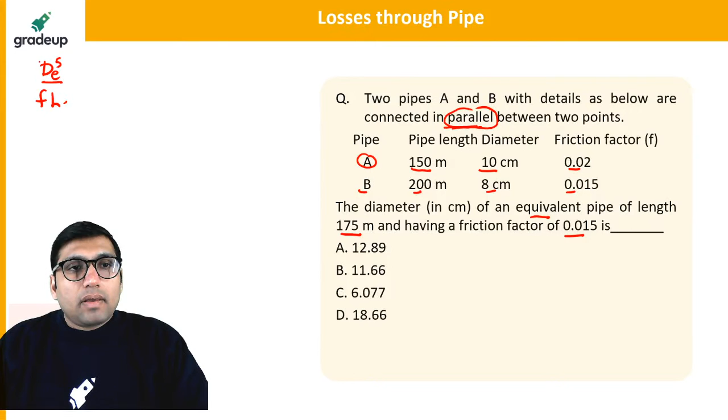Come on, be quick, guys. Equivalent diameter for a pipe in parallel connection. If you remember, I told you in the last lecture there was a formula: the equivalent diameter to the power 5, over friction factor into length, under root, is equal to root of D1 power 5 over F1 L1 plus root of D2 power 5 over F2 L2. This formula I told you for pipes in parallel connection. Didn't you remember this? For pipes in parallel connection, I told you two formulas. This one is for pipe in parallel connection with different diameters and lengths.

So you have to use this particular formula. Come on, be quick. The diameters of the two pipes are given. Let's say this is pipe 1 or A, and this is pipe B or 2. You can just put in all the values, and you will get the value of DE. You have to find this.

Very simple formula. Mohit Kundu, you will be getting 12. Okay, you are getting 12.89. Akhilesh is getting 12.11. So why will we be neglecting the value of F?

Will there be a thermodynamics and heat transfer crash course? Ashwin, the crash course of thermodynamics I have already completed. In that I completed the entire revision of thermodynamics, IC engine, refrigeration, and power plant. That is already available on the YouTube channel, you can find it there. But in the late night series also I will be covering thermodynamics, not the complete subject, but some important topics.

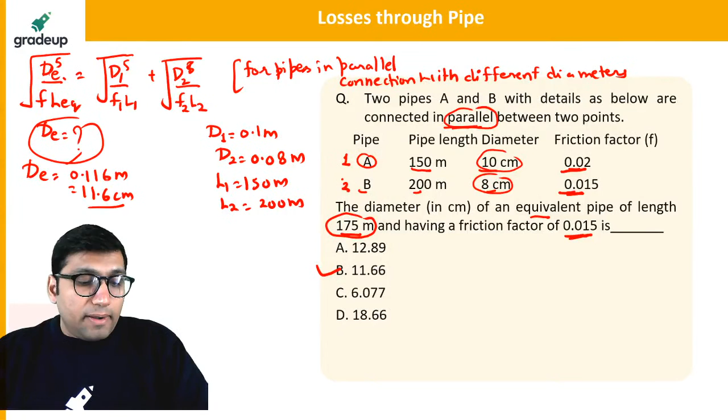You have already studied the theory of mechanics and thermo. So if you have already studied the theory part of fluid mechanics and thermo, you should only do the practice of questions. You should start solving the previous year questions and attempt the mock test. That is the best you can do now. Let's move on to question number 2.

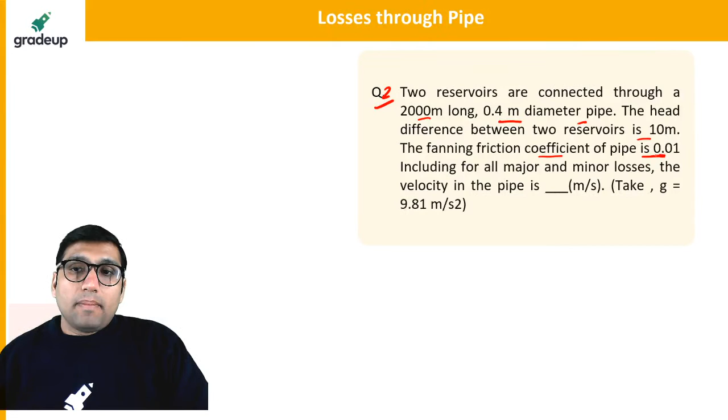Two reservoirs are connected through a 2000-meter long, 0.4 meter diameter pipe. The head difference between the two reservoirs is 10 meter. The fanning friction factor is given as 0.01. Fanning friction coefficient is 0.01. Including all major and minor losses, find the velocity in the pipe.

So how can we solve this problem? We are having two reservoirs, and these two reservoirs are connected with a pipe, let's say like this.

The two reservoirs are connected with a pipe. The length of the pipe is given as 2000 meter, and the diameter of the pipe is given as 0.4 meter. The head difference, let us say this is the level of the fluid in one reservoir, and this is the level of the fluid in the other. So the difference of the level of the fluid between both is equal to 10 meter.

Now what do you have to find? You have to find the velocity of the fluid in the pipe. They have given the total head difference between the two reservoirs, that is 10 meter. So H is equal to 10 meter.

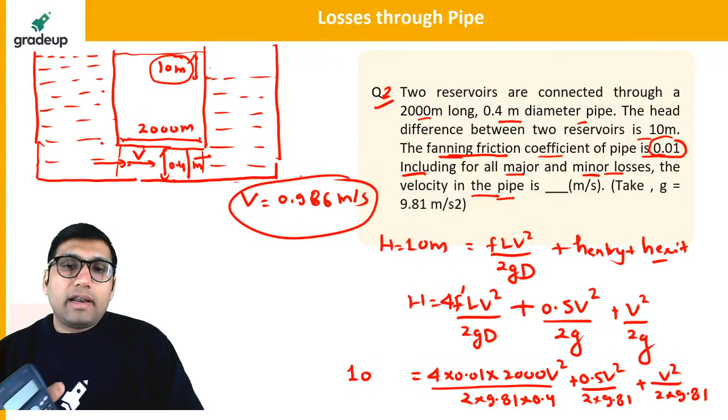It's not important if you don't have a virtual calculator, you can use a manual one. But take out your calculator and quickly solve the question. Hurry up, increase the speed.

Next question, question number 3. A horizontal pipe of diameter 400 mm is suddenly contracted to a diameter of 150 mm. The flow rate is 250 liter per second and the head loss due to sudden contraction is 1.8 meter. The coefficient of contraction is, tell me everyone, what is the answer?

Be quick, hurry up, be quick my dear. Yes Vikas, that is correct for the last question.

See guys, if you are simply watching the session and not solving the questions, you are not completely participating in the session. If you really want to learn something, you have to get completely into it. So take out your pen, calculator, a rough paper or notebook, and start solving these questions.

You have the advantage that you can do all that in your blanket. You don't have to come out to your study room and expose yourself to the cold like I'm doing, right? So my dear students, please do participate in the session and hurry up, be quick.

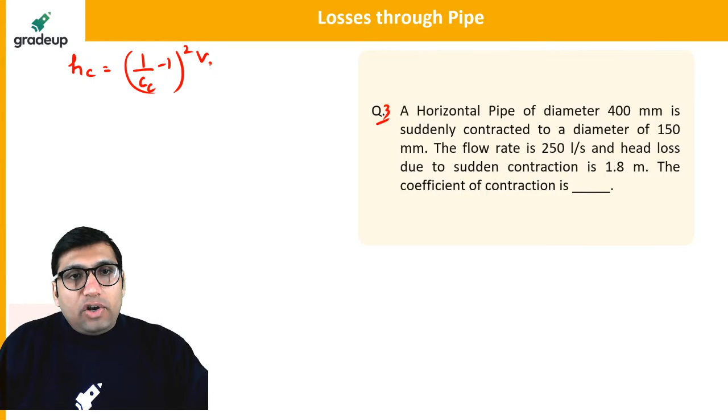The head loss due to sudden contraction equals 1 by coefficient of contraction minus 1, whole square, into V2 square by 2G. I told you this formula for the loss due to sudden contraction, didn't I?

Now in this formula you have to find the coefficient of contraction from the formula. They have given the head loss due to contraction, which is 1.8 meter. This will be 1 by coefficient of contraction minus 1 whole square into V2 square.

What is V2 here? You have to find V2 from here. They have given the diameter as 400 mm, which is 0.4 meter.

It is suddenly contracted to what diameter? It is contracted to 150 mm, which is 0.15 meter. The discharge is given as 250 liter per second, that is, discharge is given as 0.25 meter cube per second.

It is very important for you to reduce all the important terms into standard SI units. Because discharge is given in liter per second, you have to convert it into meter cube per second. Now you know that discharge equals area into velocity.

Now because you have to find the velocity, you put velocity V2 here. So you can also apply that discharge equals A1 V1 equals A2 V2. So discharge will be equal to A2 into V2, which is pi by 4 into D2 square into V2.

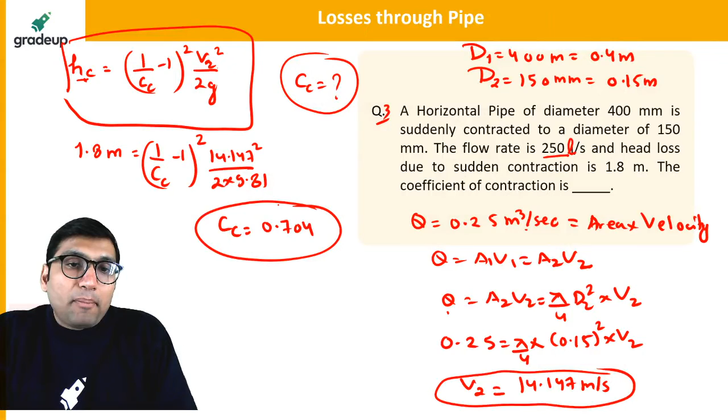Next question: the loss of head in meter when a pipe of diameter 150 mm suddenly enlarges to a diameter of 300 mm, with the rate of flow through the pipe being 300 liter per second. Here you have to find the loss due to sudden expansion.

Everybody is getting 0.704. Very good, it is very good that you are getting the answer correctly.

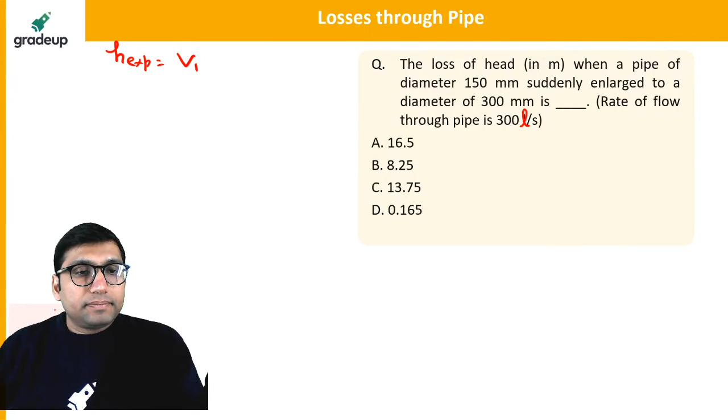The loss due to sudden expansion will be equal to V1 minus V2 whole square by 2g. That was the formula. You just have to find the velocities.

The diameter is given here: D1 is equal to 0.150 meter, D2 is equal to 0.30 meter. You have to find the value of velocity because diameter is not important, velocity is important. Discharge is already given as A1 V1 equal to A2 V2. Now using this formula you can find the value of V1 and V2.

Just put the value and you'll be getting the answer. Hurry up guys, be quick, please be quick, make it quick because we have to start a new topic also. I'm giving you 1 minute for solving this question since I have already told you the approach.

Yes, be quick, my dear students, be quick.

What I have experienced here is that the number of students who were watching the session earlier has reduced suddenly. When this series started, there used to be around 70 students in the class, but now I can see the number has reduced to just half. Why? Are you not feeling interested for preparation for the GATE exam, or do some students not find this timing suitable for the class?

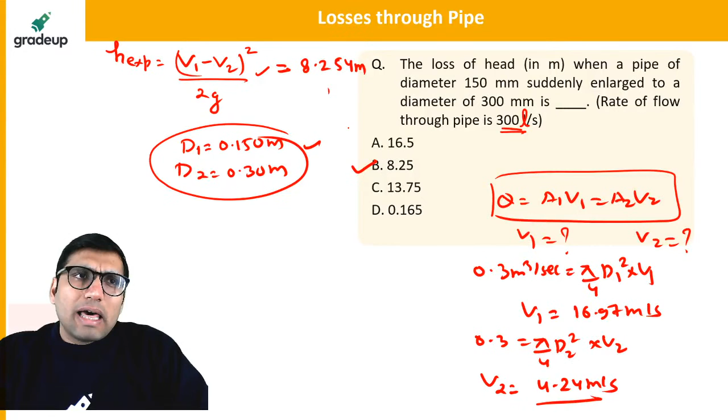Okay, the timings, well, timings were the same. I think timings have not changed because when this session started, even when the sessions were being taken by Vikas Sir, the timings were still the same, 11 p.m., right? The timings have not changed. I think from the last 10 to 15-20 days, the class has been going on with the same timings. But what has happened suddenly when I'm taking the subject of fluid mechanics?

Are you thinking that this subject is not important, or do you think that I'm not taking this subject well? What is your input? Please give me your input for this.

See, whatever important topics have been mentioned in the GATE syllabus, all those important topics I'm taking in these sessions. Still, I can see the number of candidates, the number of students, has reduced comparatively as compared to the previous sessions.

Hurry up guys. Three pipes of length 800 meter, 600 meter and 300 meter, of diameters 400 and 300 respectively, are connected in series. The end of the compound pipe is connected to two tanks whose water surfaces are maintained at a difference of 15 meter. You have to find the rate of flow in liter per second of water through the pipe, that is, the discharge. Hurry up guys, hurry up, be quick.

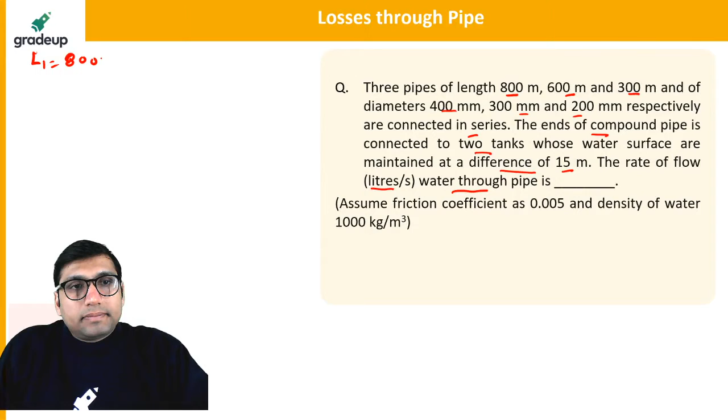3 pipes of length 800 meter, 600 meter and 300 meter. So the length of the pipe is given as 800 meter, 600 meter, and length 3 is 300 meter. This is the length of the pipe given. The diameter of the pipe is also given: 400 mm which is 0.4 meter, D2 is equal to 0.3 meter, and D3 is equal to 0.2 meter.

My dear students, what you have to do here is we are having two reservoirs, connected in such a way that we have two pipe connections. Let us say this is one pipe, then we have another pipe here. The diameter is reduced from 0.4 to 0.3, and again the diameter is reduced further. This is how the pipes are connected to another reservoir.

Now in this reservoir, if you see, the difference of the level of the fluid is given here. What is the difference given here? That difference is given as 15 meter.

We have already taken this same type of question into consideration, but the main thing here is if they have not mentioned the minor losses, we will not be taking the minor losses, because it is a case of pipe in series, the head losses will be added up. The head loss will get added up. Total head loss will be added up.

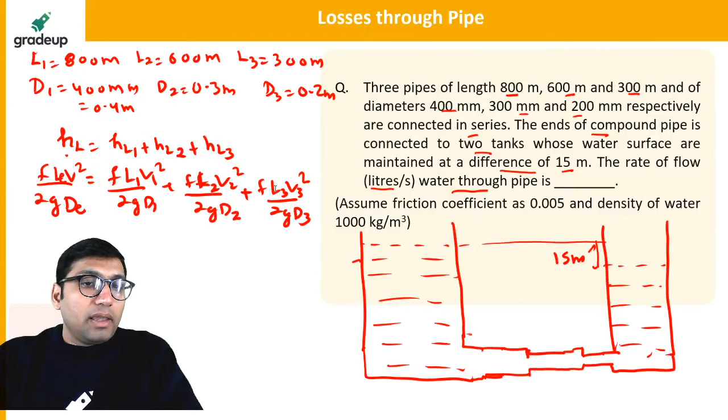You have to find the discharge in this question, which will be 84.79 liter per second. The answer for the discharge will be 84.79 liter per second. This will be the value of discharge.

Now for solving this question, it will be good if you convert this equation in terms of discharge. We know that discharge is equal to area into velocity, that is pi by 4 d square into v. It will be good if you calculate this value of velocity in terms of discharge, and put that value in.

As you know head loss is equal to FLV square by 2GD, so we can say this is equal to FL, and V is equal to 4 into Q by pi d square. This will be equal to 16 into Q square divided by 2 into pi square d power 5 into G. Correct?

Now in this question, they have given the friction coefficient as 0.005, not the friction factor. That means we have to also multiply by 4, f dash into 4. If you solve it, you get 2 into 2, this gets cancelled, giving 32 f dash L q square over pi square G d power 5. This is again the formula for head loss.

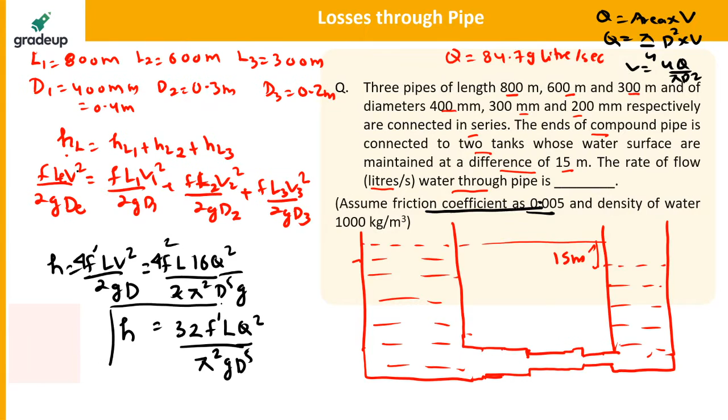If you put the formula directly, head loss will be equal to HL1 plus HL2 plus HL3, the head loss gets added up. So it is simply equal to: what is the head loss here? That was 32 into f dash L q square divided by pi square G d power 5.

This side also it will be equal to 32 into f dash q square divided by pi square into G. In the bracket you get L1 by d1 power 5 plus L2 by d2 power 5 plus L3 by d3 power 5. This we can get easily cancelled, so we can say that q square d power 5 will be equivalent to L1 d1 power 5... q square, one second... sorry, this is already given in the question, this value is already given, I will not be cancelling it.

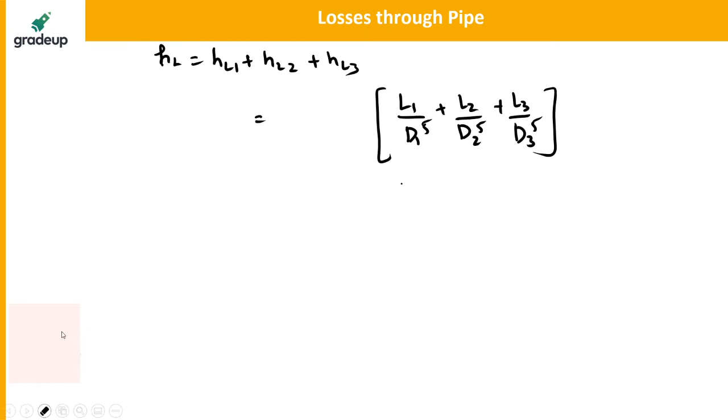84.7, are you getting this value? It will be 32 into f q square, f dash q square divided by pi square g.

This value is given as already 15. If you put all the values, friction factor is given, L1, L2, L3, D1, D2, D3 is given, everything is given, you will get discharge as 0.0847 meter cube per second, or you will be getting it as 84.7 liter per second. Are you getting this value, everyone? So see, I could have directly applied the Dupuit's equation, but in that situation we will not be getting the discharge.

Dupuit's equation is in terms of length and diameter. Here we have to find that in terms of discharge. So we have basically converted our equation in terms of discharge. Is it clear to everyone? Yes.

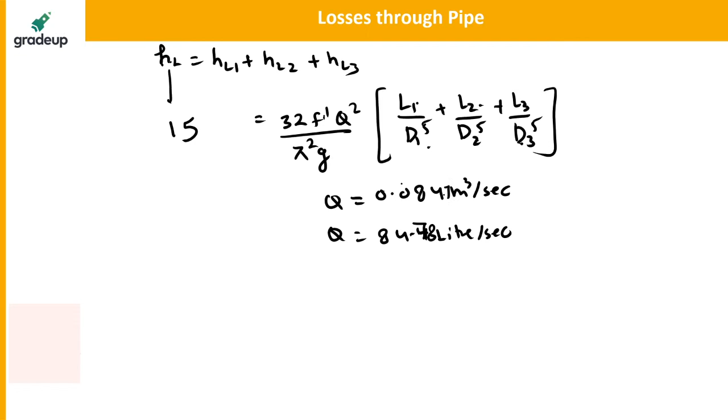Is it clear? That was the last question. Now let us quickly hurry up. You will be getting 84.7, 84.78, 0.0847. Okay, so now let us come to the topic of viscous flow through pipe.

I will not go very quick, but I will be making you understand the concept of viscous flow very comfortably. See, what is the meaning of viscous flow first of all? As it is quite evident that viscous is related to the concept of viscosity, something related to viscosity, or it is something related to viscous force.

So for the meaning of viscous flow, no, why we are not considering the minor losses? If they are not mentioned in the question, we will not be considering the minor losses. Until and unless they are not mentioned to be considered, we will not be considering the minor losses. In the last question that we have solved earlier, they have already mentioned to include the minor and major losses, that is why we have included them. In this question, they have not asked anything to include the minor losses. If they will not ask anything, you will not be including the minor losses.

Oh, thank you so much, Neeta. Thank you so much. I hope you guys are enjoying the session. And let's basically move forward for viscous flow through pipe, which is the current topic of this session.

So these were few previous year questions from the last topic that we were not able to cover. So let's basically start the discussion.

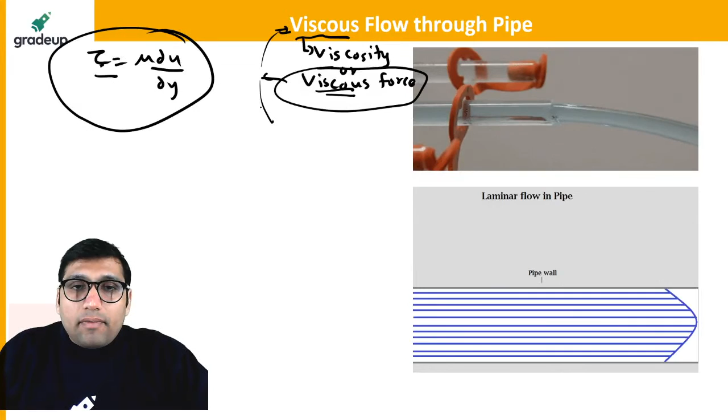Viscous force, or viscous flow, is defined as the flow in which high viscous forces or viscous effects are dominant. This is called viscous flow.

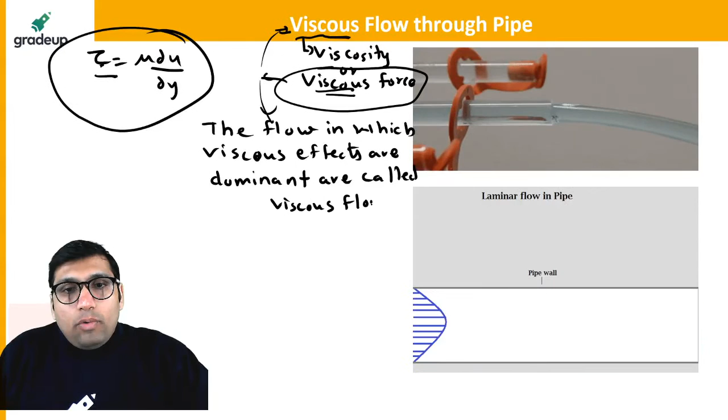To be very precise, you can also call it laminar flow. Why is it called laminar flow?

Because a flow is defined as laminar or turbulent based on a number called Reynolds number. Reynolds number is the ratio of inertia force by viscous force.

What is inertia force? It is defined as the force which acts exactly opposite to the direction of motion. Like F equals mass into acceleration, this force acts in the opposite direction to the force applied. That is called inertia force, which you must have understood from Newton's first law of motion.

So what is the meaning of laminar flow? Why is it called viscous flow? The simple meaning is that in the case of laminar flow in a pipe, the Reynolds number is less than or equal to 2000.

So why is the Reynolds number less than or equal to 2000 for laminar flow? Because viscous force is more dominant than inertial force. That means laminar flow is defined as highly viscous flow with low velocity. A flow characterized by high viscosity and low velocity is called laminar flow or viscous flow.

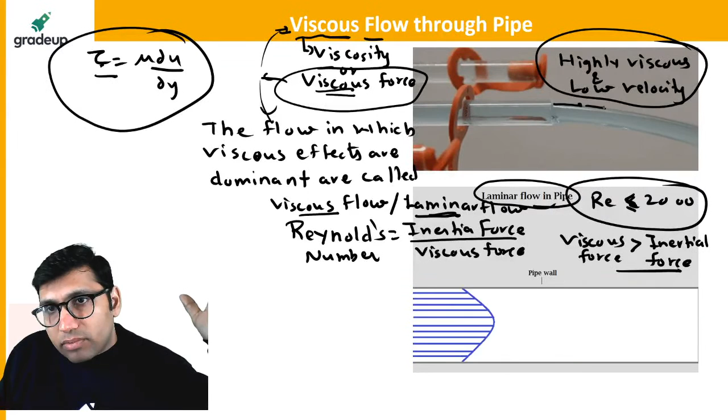The flow perfectly looks like it's flowing in a perfect pattern. If you clearly see, the fluid is exactly following a perfect pattern. This is how the laminar flow will take place.

You can see this animation also going at the bottom. This is how laminar fluid flow takes place in perfect streamlines, in perfect order. That is called laminar flow. Why does it take place in such a perfect manner? Because of the high viscous forces acting between the fluid particles, which allow them to move like this.

In comparison to laminar flow, turbulent flow has high velocity. It is characterized by high velocity flow and low viscosity. A flow with high velocity and low viscosity is termed turbulent flow. In the case of pipe flow, if the Reynolds number is greater than or equal to 4000, that is called turbulent flow. So that is the major difference between laminar and turbulent flow.

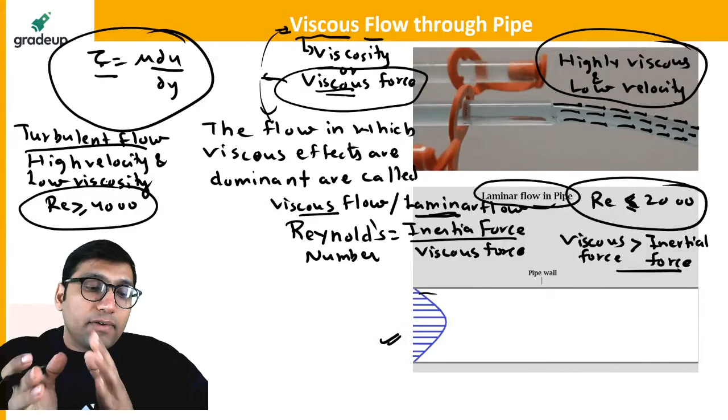Now I would like to point your attention to a very important thing. Since we are studying laminar flow in a pipe, I would like to point out a very important topic called fully developed flow. What is the meaning of fully developed flow?

When flow takes place inside a pipe, a pattern is followed. At the entrance of the pipe, the velocity profile will start to grow. Initially, when the fluid tries to enter the pipe, there will be little velocity gradients. At the surface of the pipe, the fluid particles will be having zero velocity due to no slip condition.

Due to no slip condition, the velocity will be zero. But as the flow proceeds inside the pipe, there will be some velocity gradient like this. If you join the points of maximum velocity, you will be getting this kind of layer which is called the boundary layer.

So what is this layer formed in the pipe? This is called the boundary layer. This is the layer having the maximum velocity. If you connect the points of maximum velocity, that is the free stream velocity, you get this layer which is called the boundary layer.

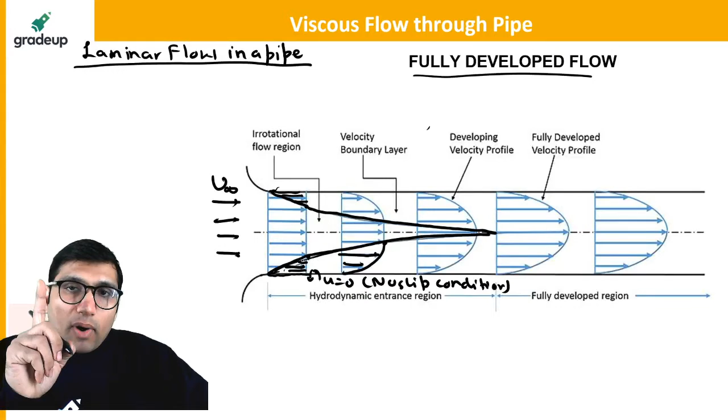Now the important point is, what is the meaning of fully developed flow? Fully developed flow is defined as the condition in a pipe flow, especially in a pipe flow, because in the case of flow over a plate, the flow is called fully developing flow. It is never a developed flow, it is always a developing flow. It is only possible for the flow to be fully developed in the case of flow through a pipe.

So it is defined as the condition in a pipe when the velocity profile becomes constant. If velocity profile becomes constant, that condition is called the fully developed flow, when there is no variation of the velocity profile. Initially, when the flow starts to proceed in the pipe, the velocity profile is perfectly flat, like this.

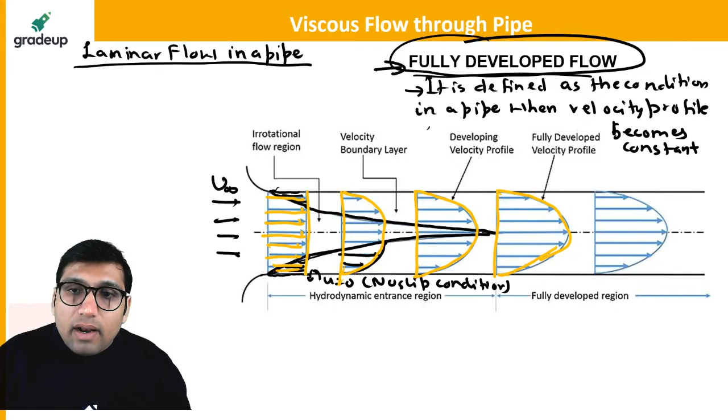But as you move further, the velocity profile will change like this. Now there will come a point in the fluid flow when the velocity profile becomes constant. It will not change after some point. As you can see in this region, after this particular point, the velocity profile has become constant. It is not changing, it has become perfectly constant like this.

So this region in which the velocity profile has become constant is called the fully developed region. After this particular point, the velocity profile will always be like this, no matter how far you go in this direction. The velocity profile will remain constant.

So this condition is called fully developed flow, when the velocity profile becomes constant. Or you can say du by dx in this direction will become constant. This is the meaning of fully developed flow.

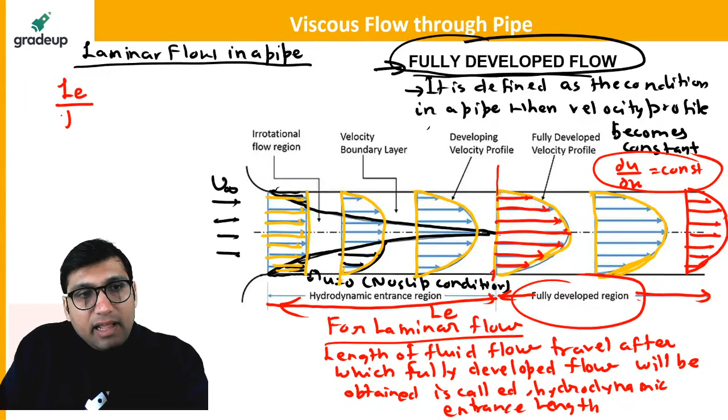So this length will be equal to LE, and LE by D is equal to 0.07 times Reynolds number. If you have to find the entrance length, the entrance length after which the velocity profile becomes constant, that entrance length LE is the entrance length in the pipe after which the velocity profile becomes constant. There will be no variation of the velocity profile after this particular length in laminar flow.

D is the diameter of the pipe, which is obviously a constant here. Diameter is not varying. Re is the Reynolds number into 0.07. By using this formula, you can find the amount of entrance length after which the velocity profile will become constant in laminar flow.

Is it clear to everyone? This is something which is sometimes asked in exams, sometimes repeatedly asked: fully developed laminar flow in a pipe. What is the meaning of this? Fully developed flow means in pipe flow, the region in which the velocity profile is not at all variable, the variation of the velocity profile becomes constant. There is no variation of velocity profile. That region is called fully developed region or fully developed flow.

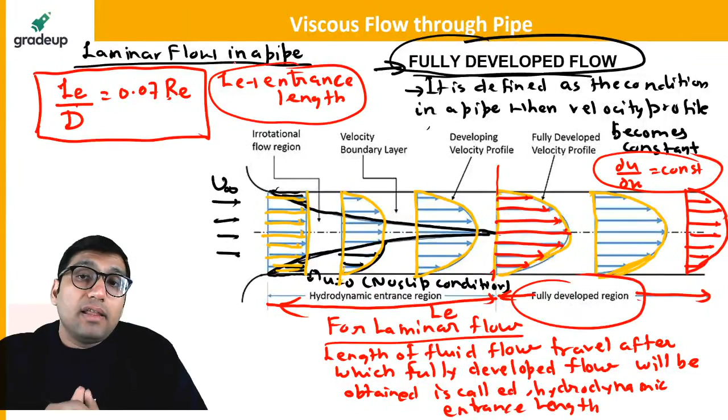Now there is a very important point. In pipe flow, there are some derivations that I have to tell you. Let us say we are having a pipe flow in a pipe, the fluid is flowing in the pipe, and we have to find the shear stress distribution for laminar flow through a pipe. So we'll be considering a fluid element. This is a fluid element.

On this fluid element, we will figure out what kind of forces are acting. Basically, there will be two forces acting: one is pressure force, and the other is shear force. If you apply the force balance equation, net force is equal to 0. Why? Because there is no acceleration, since the velocity profile is constant, acceleration will be 0.

Because the velocity profile is constant, velocity variation is not taking place. du by dx is 0 in fully developed flow, since the velocity profile becomes constant. So in that situation, there will be no acceleration, and net force will be 0.

What will be the net force here? Net force will be equal to the pressure force: P into pi r square, where P is the pressure on this particular area. On the opposite side, it will be P plus dP by dx. Let us say this particular small element has a very small radius equal to r.

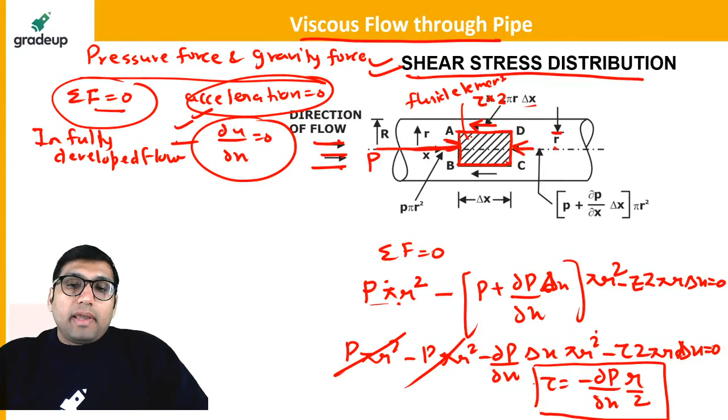You'll be getting this relation for the shear stress. The shear stress will be coming out to be minus of del P by del X of R by 2. This will be the value of the shear stress we'll be getting here, minus of del P by del X of R by 2.

Now shear stress distribution you have got. This is the shear stress distribution. Tau is equal to minus of del P by del X, R by 2, where R is the local radius. R is defined as a very small radius which is basically varying in the pipe. For a local radius means for a very small fluid element, the radius which is basically variable, that is called local radius.

So this is the shear stress which we'll be getting. What is the condition of how the shear stress will vary in the pipe? When R will become 0, when local radius will become 0, shear stress will become 0. When this local radius will become equal to the radius of the pipe, in that situation the tau will become maximum, the shear stress will become maximum, and that maximum shear stress will be equal to this. This will be the value of the maximum shear stress you will be getting.

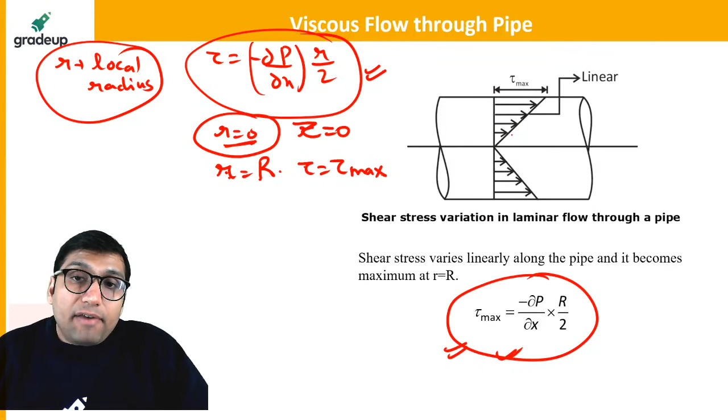So how does the shear stress vary in the pipe? In the pipe flow, the shear stress will be equal to 0 at the center, and it will be maximum on the wall. So we can say there is a linear variation of the shear stress in the pipe. The variation of shear stress in the pipe is actually a linear variation.

So let us talk about the velocity distribution in the laminar flow through the pipe. To understand the velocity distribution of the laminar flow in the pipe, let us say we are having a local radius r, and y is the distance from the pipe wall. What is the y here? Y is the distance from pipe wall.

Okay, in which we try to visualize the phenomena of velocity distribution. So we can say that if this is r, this is y, so this total distance will be equal to the radius of the pipe. So radius of the pipe will be equal to r plus y. If you differentiate this, you can say dr plus dy will be 0. Why? Because this radius of the pipe is constant, R is radius of pipe, it is a constant thing. This is variable, but this is not a variable. Radius is constant. So this will give you dr will be minus dy.

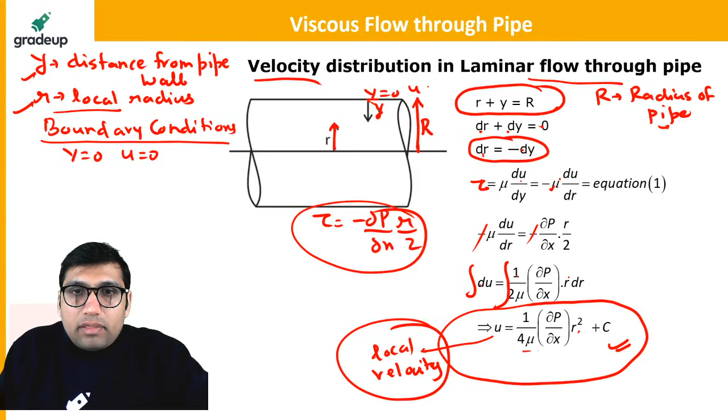Now there will be a boundary condition. What boundary condition will be used? There will be two boundary conditions used to find this constant. The first boundary condition is at y is equal to 0, u will be equal to 0. That means at this condition, when y is 0, u will be 0. That is also the no slip condition.

And another simple boundary condition involves local velocity. The local velocity is that velocity which varies with local radius. The velocity which varies with a local radius is called local velocity. So, my dear students, this is one boundary condition.

Other boundary condition is when r will become equal to R. In that situation, what will happen to the velocity? When r becomes equal to R, when this local radius becomes equal to the radius of the pipe, then u will become equal to 0. So if you put the value of r as R, you will be getting u equal to 0.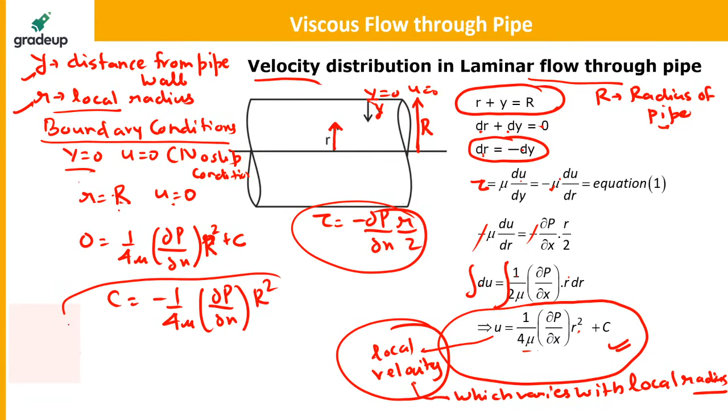That will be 1 by 4 mu del p by del x, r square plus constant. If we put r equal to R, this will be R. So you will be getting c as minus 1 by 4 mu del p by del x, R square. Now if you put the value of c in this equation, you will be getting u equal to minus 1 by 4 mu del p by del x, r square into 1 minus...

So I would like to write it again here. Your u, the local velocity, was equal to 1 by 4 mu del p by del x, r square plus constant. Your constant is equal to this. If you put the value of the constant, you will be getting 1 by 4 mu del p by del x, r square minus 1 by 4 mu del p by del x, R square, the radius of the pipe. If you take 1 by 4 mu common, you will be getting this.

If you take minus 1 by 4 mu del p by del x common, this will make the value R square minus r square. If you take r square common, you will get minus 1 by 4 mu del p by del x, r square, 1 minus r square by R square. So this will be the formula for local velocity.

Okay, all the best Prateek for your interview, the JRF interview at DRDO.

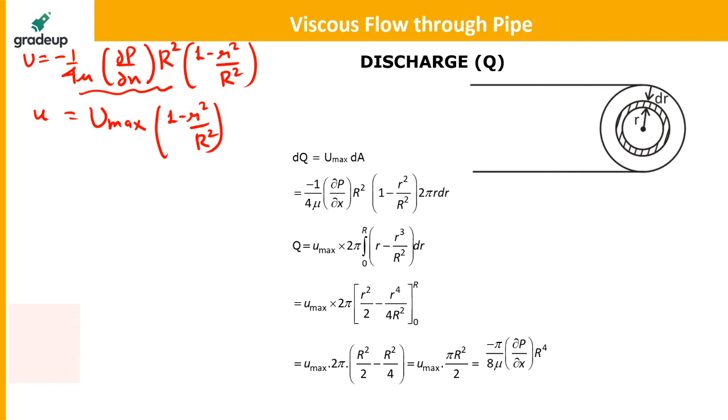One more important thing I have to point out here is how the velocity distribution takes place in laminar flow in the pipe. The velocity distribution is a parabolic velocity distribution. Velocity will be 0 at the pipe wall, and it will be maximum at the center.

When r becomes 0, u becomes maximum - that is the maximum velocity in pipe flow. For laminar flow in the pipe, the maximum velocity will be equal to minus 1 by 4 mu del p by del x of r square, where r is the radius of the pipe, del p by del x is the pressure gradient, and mu is the viscosity. This is the formula for maximum velocity.

So where does maximum velocity take place? At the center of the pipe. This is also called maximum velocity, or center line velocity, because this maximum velocity occurs at the center of the pipe.

Clear everyone? Maximum velocity, you can also call it center line velocity.

No problem, my dear. Two things I have noticed very carefully - congratulations first of all, Prateek, you are having your interview tomorrow. Another thing I have noticed is how much your attention level is in the class. You are preparing for an important GATE exam, but most of you are giving your time to comments in the chat box. Guys, if you will not focus in the lecture, then how are you going to understand it? There is enough time for discussion about other things, but right now you have to focus on the lecture, my dear.

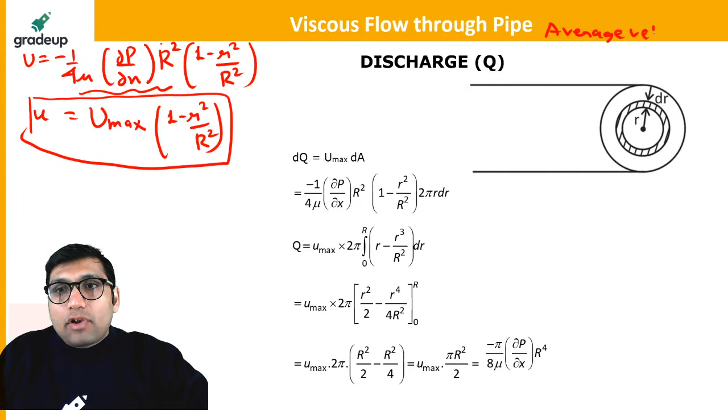But for solving problems, you need the value of average velocity. Why is average velocity required? Because there is a velocity distribution in the pipe - velocity is not constant, it is variable. There is zero velocity at the wall, maximum velocity at the center, and at other points the velocity will be variable.

If you have to find the Reynolds number, which is rho V d by mu, how can you find this? For Reynolds number, we have to put the velocity which has to be average velocity, my dear. Average velocity, is it right? For finding Reynolds number, you have to find average velocity. But velocity is varying in the pipe - there is a variation of velocity in the pipe.

It is maximum at the center, zero at the wall, and has a different value at other portions in the pipe. For finding the Reynolds number, you have to find the average velocity. So how can you find the average velocity in flow through a pipe? For that, we have to do some derivation. You know that discharge is equal to area into average velocity.

So we can say that a small discharge in the pipe will be equal to local velocity into a local small area. After finding this small discharge, we can integrate it to find the total discharge. This small discharge equals local velocity times area - you can put the value of local velocity in this relation. Area, dA, will be equal to 2 pi r into dr - this is the change in area.

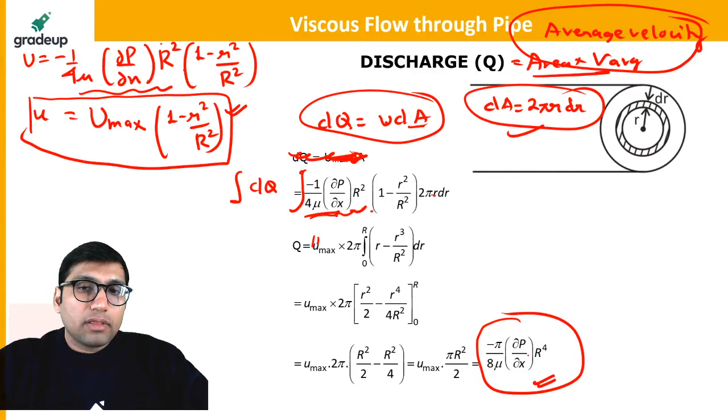After integrating, for the laminar flow through pipe, the discharge is equal to minus pi by 8 mu del p by del x r power 4. Are you able to understand this or not? This is the value of discharge in laminar flow through pipe, or viscous flow through pipe.

If you are not able to understand the integration, I can tell you again, although it is mentioned. This value is equal to the maximum velocity, this quantity.

If you multiply this quantity 2 pi r inside, this will be r minus r cube by r square. If you integrate this, you will be getting r square by 2 minus r power 4 by 4 r square. If you put the limit, you will be getting this quantity.

Again, we will be putting maximum velocity as minus 1 by 4 mu del p by del x of r square. If you put the value, you will be getting this value of the discharge. So this is a formula for total discharge in the pipe, laminar flow through pipe, in terms of radius.

If you have to find it in terms of diameter, you know that r is equal to d by 2. If you put r is equal to d by 2, you will be getting the total discharge in terms of diameter, which will be this. This will be the formula for total discharge in terms of diameter of the pipe.

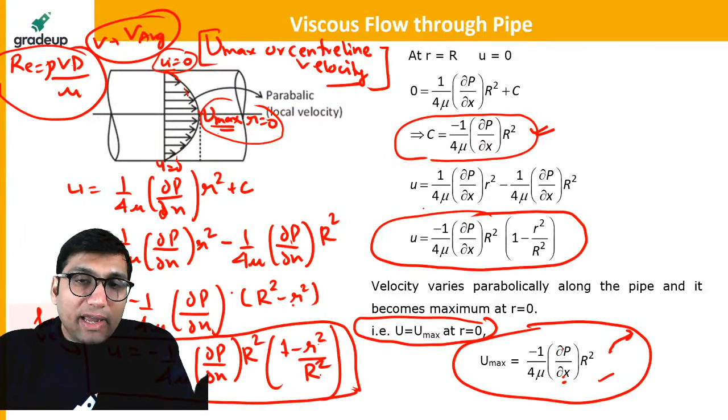So you'll be getting this value as total discharge for the laminar flow through pipe, and you can also say, in terms of radius, it is equal to minus pi by 8 mu del p by del x r power 4. This is the formula for total discharge in terms of radius, and this is in terms of diameter.

Now, why are we finding this total discharge in the laminar flow through pipe? The reason we are finding the total discharge was we have to find the average velocity. And how can you find the average velocity? The average velocity will be equal to, the total discharge is equal to area into average velocity.

What is the area of the pipe? Area will be equal to pi r square. So you can put this value, total discharge is equal to average velocity into area, pi r square. This will get cancelled out, this will be r square. If you solve it, you will be getting this as average velocity. So this is the value of the average velocity of the laminar flow through pipe.

The maximum velocity was equal to what? This is the maximum velocity, this is the average velocity. If you see the relation between the average and maximum velocity, you will find that the average velocity is equal to half of the maximum velocity for laminar flow through pipe. This is a relation between the average and maximum velocity.

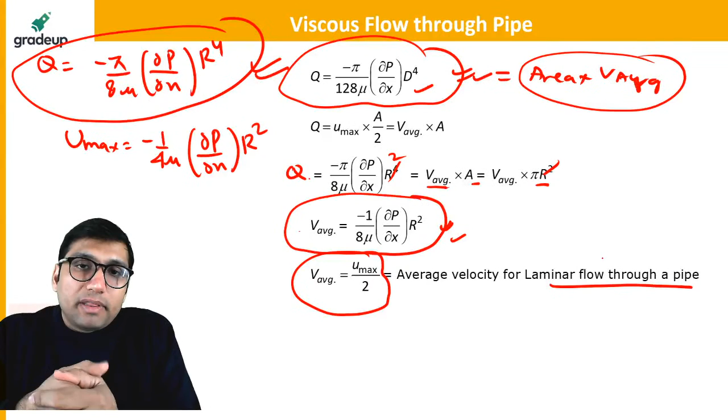So let us understand another part, which is pressure drop in laminar flow through pipe. If you have to find the pressure drop in laminar flow through pipe, how can you find that? Let us say we are having a flow through a pipe, and in this pipe section, if you have to find what is the variation of pressure between these two particular portions in the pipe. Let us say the distance between these two portions is L, and you have to find the pressure drop between two sections of the pipe. Let us say this is section 1, this is section 2.

So what is the pressure drop between these two particular points in the pipe? How can you find that? We know that the average velocity is equal to half of the maximum velocity. We have just figured it out, right? Average velocity in the pipe is half of maximum velocity, or we can say maximum velocity is equal to 2 times average velocity. What is maximum velocity?

It is equal to minus 1 by 4 mu, del p by del x, of r square. If you put all the terms on the other side, it will be equal to minus del p is equal to 8 mu V del x by r square.

If you integrate it from 1 to 2, this will be integrated from 0 to L. Let us say the length here is 0 and here it is L. If we started from 0, this will be L total. The dx will be integrated from 0 to L. So here the limit will be from 1 to 2, and here the limit will be from 0 to L, because length will be varying from 0 to L, right? So if you integrate it, you will get P1 minus P2 equals 8 mu L V by R square.

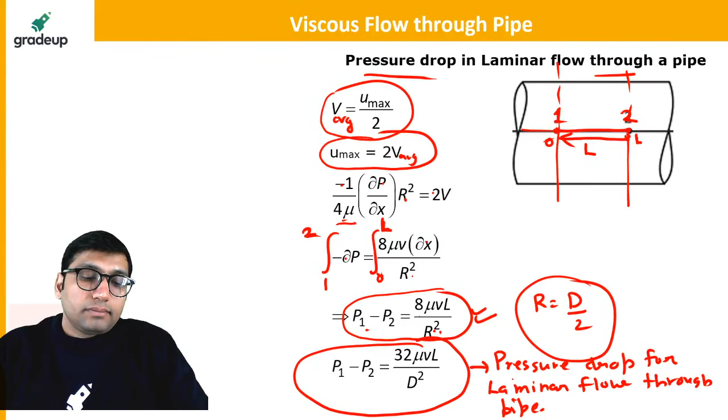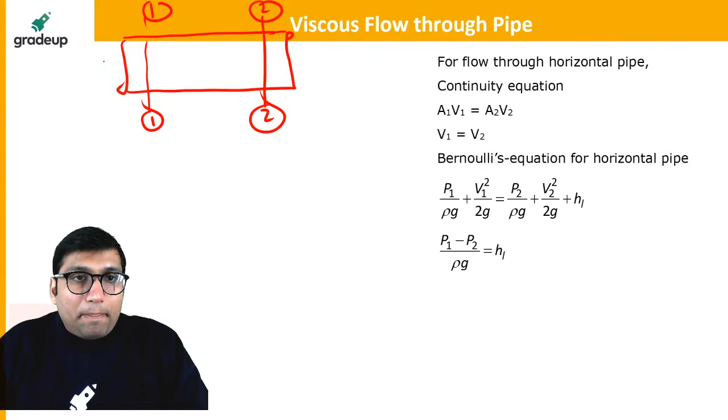Now I have to tell you a very important thing. Let us say we have a pipe, and in that pipe, this is section 1, this is section 2. Between these two sections, if you apply the continuity equation to the flow through the pipe, it will be A1 V1 equals A2 V2. Now because this pipe has constant diameter, it is not variable, so A1 will equal A2 in this situation, and because A1 equals A2, V1 will also equal V2.

Now if you apply the Bernoulli equation for a horizontal pipe, for a real fluid, it will be this. This is the Bernoulli equation for a horizontal pipe for a real fluid. Now because the velocity will be the same, it gets cancelled out. And because it is a horizontal pipe, Z1 equals Z2. So ultimately we get the head loss for laminar flow through a horizontal pipe of uniform diameter equal to P1 minus P2 by rho g.

So we are coming to a very important equation. As I just told you, for laminar flow, P1 minus P2, that is the pressure drop, is equal to 32 mu VL by d square. This is the formula for the pressure drop for laminar flow through a pipe. If you put the value of this pressure drop here, you will get the head loss equal to 32 mu VL by rho into g d square.

This is the formula for the head loss you'll get for laminar flow through pipe. Clear everyone? And to be very precise, this is the formula you'll get for fully developed laminar flow through pipe. This is the formula for head loss for fully developed laminar flow through pipe.

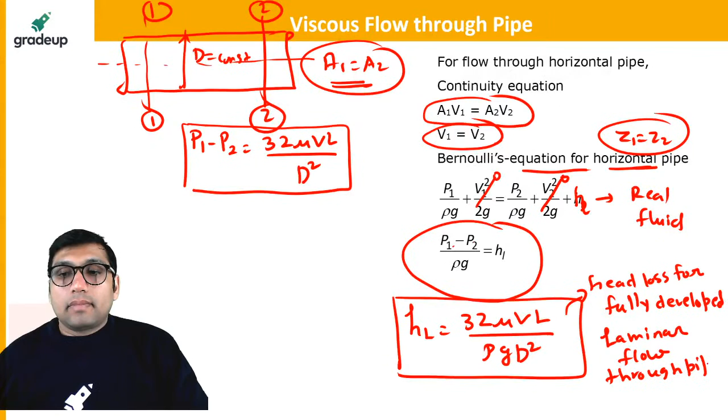So my dear students, we have got the head loss formula. The head loss due to friction for fully developed laminar flow in a pipe is equal to 32 mu VL by rho g d square. But we also cannot ignore that in the last lecture I told you the formula for head loss due to friction, the major head loss due to friction, which was FLV square by 2gD. This is also the formula I taught you in the last class.

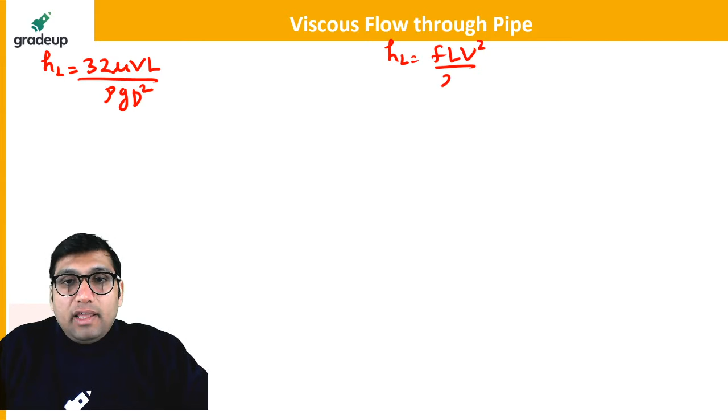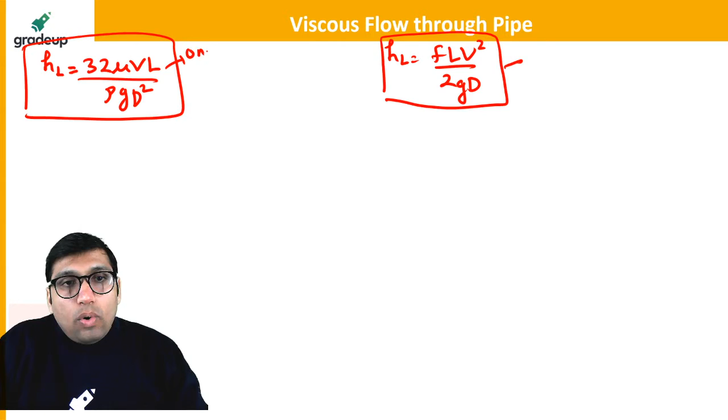Now if you equate both formulas, this is also the formula for major head loss due to friction, but this formula can be applied anywhere, whether it is laminar flow or turbulent flow, anywhere. This other formula can only be applied for fully developed laminar flow in a pipe.

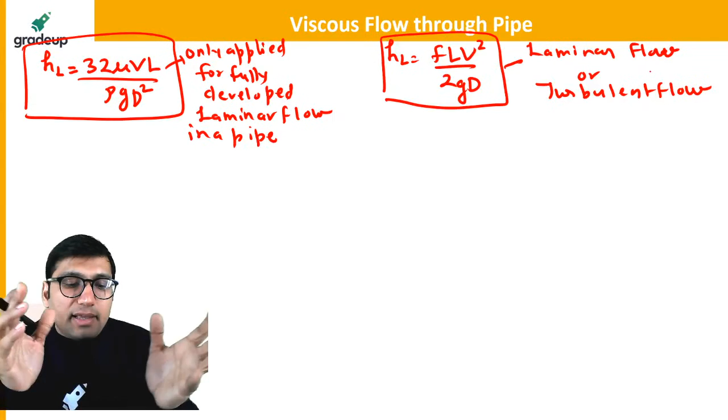Laminar flow in a pipe. This formula cannot be applied anywhere else. But this formula, my dear, can be applied for both laminar flow and turbulent flow. It can be applied for laminar flow or turbulent flow to find the major head loss due to friction. Now you must be thinking, is there any relation between these two we can get from here?

So if we are having a laminar flow, and fully developed laminar flow, we have got this head loss. If you equate these two, equation number 1 and equation number 2, because this can also be applied for laminar flow, you will be getting 32 mu V L by rho G D square is equal to f L V square over 2 G D.

Right? Here everyone. Or if you just do some cross product here, this will get cancelled out. Sorry, rho will not get cancelled out. This will get cancelled out here. One of the velocities will get cancelled out here. The length will get cancelled out here. Ultimately, you will be getting that friction factor will be equal to 64 into mu divided by rho V d. As we know that Reynolds number is equal to rho V into d by mu.

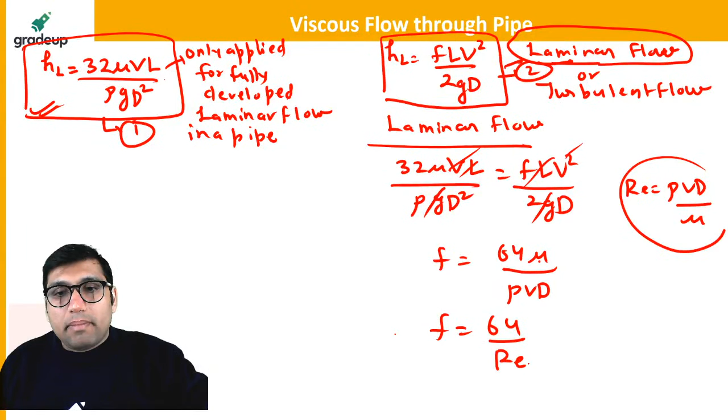So we can also say that this friction factor is equal to 64 by Reynolds number. This condition is only applied for friction factor. The friction factor can also be written as 64 by Reynolds number only for laminar flow in a pipe. You cannot apply this formula for friction factor in any other condition. For laminar flow in a pipe, the friction factor is equal to 64 by Reynolds number, and we can say friction coefficient will be equal to 16 by Reynolds number.

This is friction coefficient, or coefficient of friction, or Fanning coefficient of friction. Clear everyone? The coefficient of friction will be equal to 16 by Reynolds number and friction factor will be equal to 64 by Reynolds number for laminar flow in a pipe. Is it okay with everyone?

Is it clear? So my dear students, I would like to point out a very important thing here: it is only applied for laminar flow. First of all, this formula can only be applied for laminar flow. If it is a laminar flow in a pipe, then only you can apply this formula for head loss. Okay, we can discuss, it is correct, Manish.

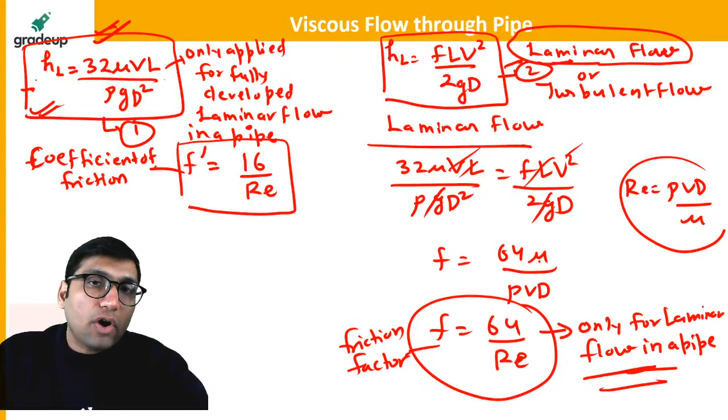For turbulent flow it will be 0.316 divided by Reynolds number power 1 by 4, but that we'll discuss in the turbulent flow topic. Okay, so that is all important for your laminar flow in a pipe. You have to remember some basic formulas for laminar flow in a pipe.

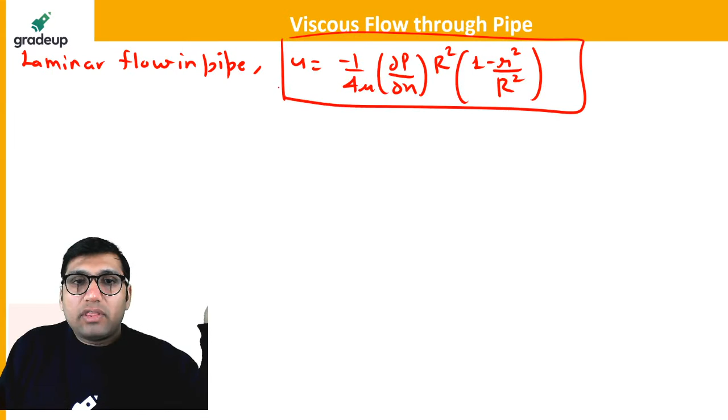The formula which is important is the formula for velocity distribution. Local velocity is equal to minus 1 by 4 mu, del p over del x, into r square times 1 minus r square by r square. This is the formula for local velocity, the velocity distribution. One more thing: the velocity distribution in the pipe flow is a parabolic velocity distribution.

So this is how the velocity distribution will be taking place. The velocity will be maximum at the center and it will be zero at the wall. This is a parabolic velocity distribution. I have also told you the shear stress. Shear stress is equal to minus of del p by del x, r by 2. This is the local formula for the shear stress.

The maximum shear stress takes place at the wall; we can say it is equal to maximum shear stress in the laminar flow in a pipe. How does the shear stress vary in a pipe? This is how the shear stress varies in the pipe. Okay, it is zero at the center and maximum at the wall. This is how the shear stress will be varying.

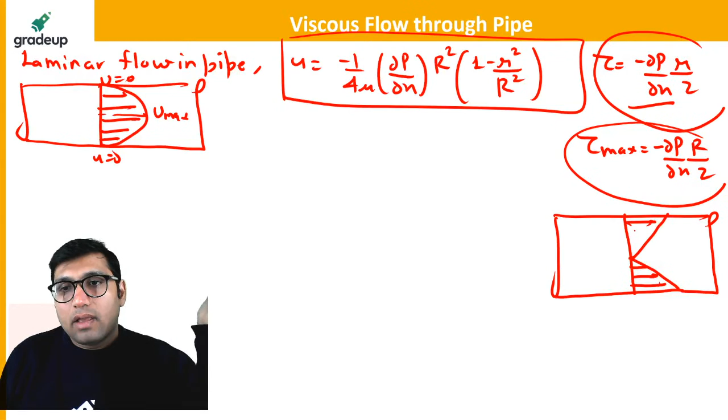Okay, this value is the maximum velocity. For maximum velocity in a laminar flow in a pipe, it is equal to minus 1 by 4 mu, del p over del x, of r square.

Discharge is equal to minus pi by 128 mu, del p by del x, d power 4. This is the formula for discharge for laminar flow in a pipe. The average velocity in a laminar flow in a pipe is equal to minus 1 by 8 mu, del p by del x, of r square, or we can say average velocity is equal to half the maximum velocity.

The pressure drop is equal to 32 mu V L by d square, and the Hagen-Poiseuille equation says that the head loss in a laminar flow in a pipe can also be written as 32 mu V L by rho g d square, and friction factor for laminar flow in a pipe is equal to 64 by Reynolds number. These are some important points that you have to remember for laminar flow in a pipe.

I have revised all the important formulas that you require for solving the problems for laminar flow in a pipe. Is it clear to everyone?

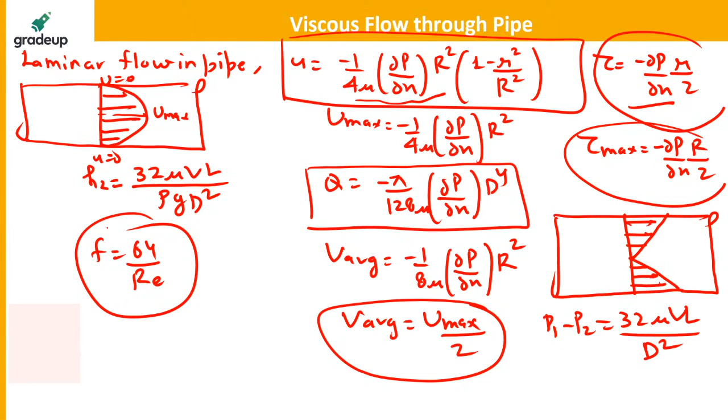What about r power 4? Where will it be r power 4, Vikas? In terms of diameter, it will be minus pi by 128 mu del p over del x, d power 4. In terms of radius, it will be r power 4. I have written the formula for discharge in terms of diameter.

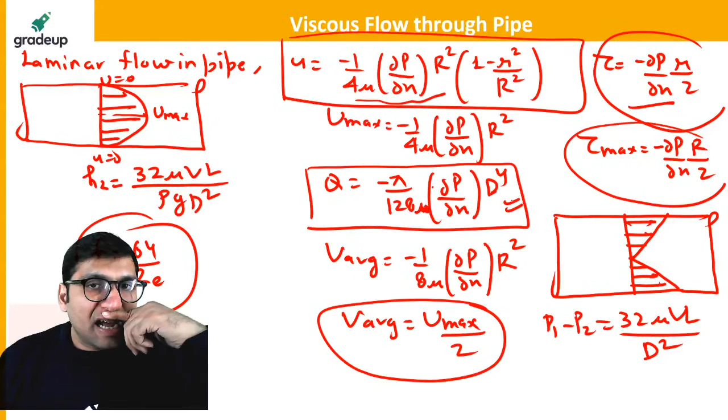Since this is not something I had decided for this session, I feel like just telling you about viscous flow through pipe will not be sufficient. So I would like to point out a very important topic: viscous flow through a plate, especially the flow between two parallel fixed plates. I will tell you some relations which are important for laminar flow between two parallel fixed plates. Let us say we are having two parallel fixed plates.

Thickness between the plates is equal to B. B is the thickness or distance between the two plates. These are the two parallel fixed plates.

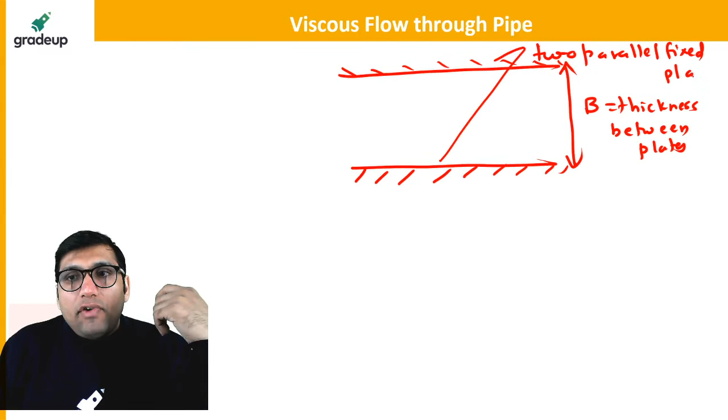So if you have to study laminar flow between two parallel fixed plates, I hadn't planned to discuss this, but I feel I should tell you because it is important too. Just like laminar flow in a pipe is important, laminar flow between two parallel fixed plates is also important. So I will only tell you some important formulas that you have to remember. I cannot teach you everything since I haven't planned for it, but I will tell you the key formulas for laminar flow between two parallel fixed plates.

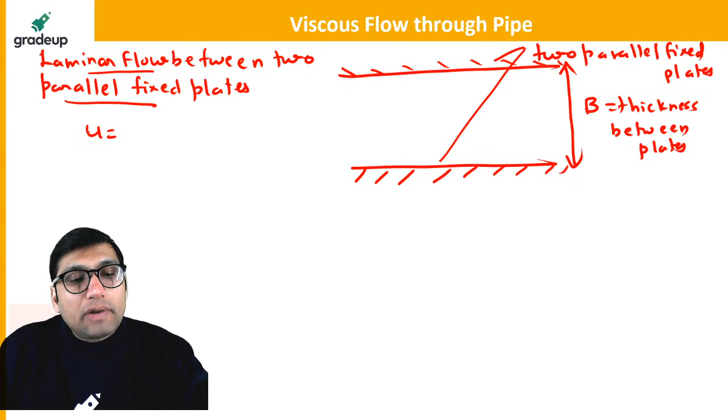So my dear students, for laminar flow between two parallel fixed plates, the velocity distribution you will get is the local velocity distribution, given by 1 by 2 mu del p by del x.

I will not explain how we derive this since we don't have much time. The formula is 1 by 2 mu del p by del x of b y minus y square. This is the formula for the velocity distribution for the flow between two parallel fixed plates.

One more thing: in the case of laminar flow between two parallel fixed plates, the velocity distribution is parabolic here also. There will be maximum velocity at the center and zero velocity at the wall between the two parallel fixed plates. At the surface of the plate, the velocity will be zero because of the no-slip condition, and it will be maximum at the center. So we will be having a parabolic velocity distribution here also.

Is it clear to everyone? And what will be the maximum velocity in this case? You will get the maximum velocity when y becomes b by 2.

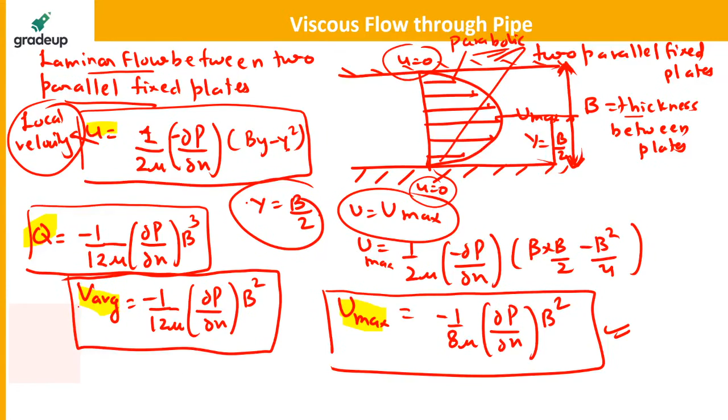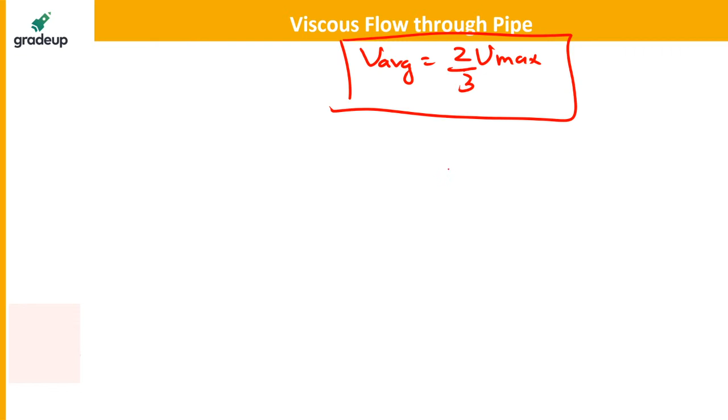One more thing, for laminar flow between two parallel fixed plates, the average velocity will be equal to 2 by 3 of maximum velocity. This is a relation between the average and maximum velocity for laminar flow between two parallel fixed plates. So we can say that the average velocity is equal to 2 by 3 of maximum velocity.

And the pressure drop will be equal to 12 into mu into V into L by B square. This will be the value of the pressure drop. In a flow between two parallel fixed plates, if you have to find the pressure drop between two sections, point 1 and point 2, the pressure drop between these two sections will be equal to 12 into mu VL by B square, where B is the distance between the two fixed plates.

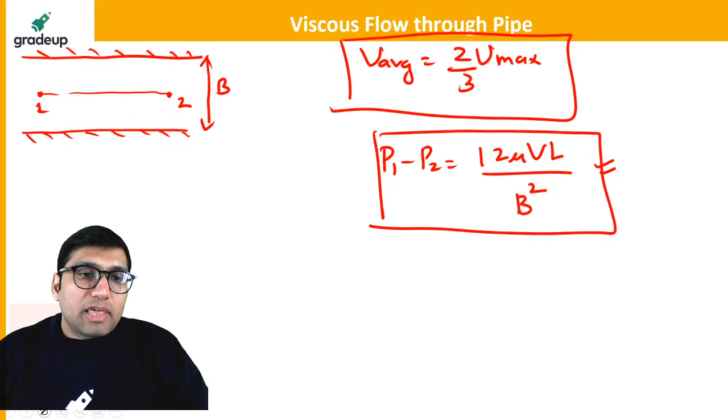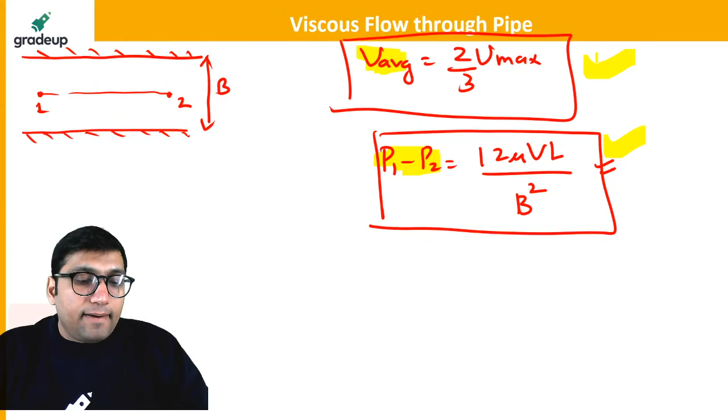Is it clear everyone? Are all these formulas clear or not? So this is all important, whatever I'm highlighting here, this is all very important. Please be very much careful about this, whatever I'm highlighting here. These formulas are very important, because sometimes in your exam they will be asking you questions on these things from laminar flow between two parallel fixed plates. So these formulas are important.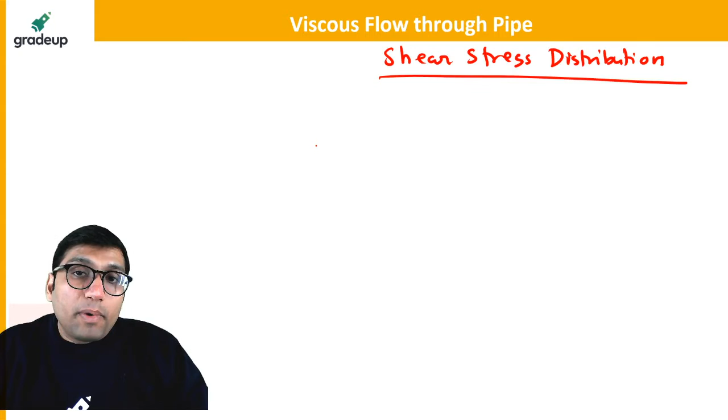Now let us talk about the shear stress distribution. Shear stress distribution for laminar flow between two parallel fixed plates will be equal to, tau will be equal to minus of del P by del X, B by 2 minus Y. This is the formula for the shear stress distribution.

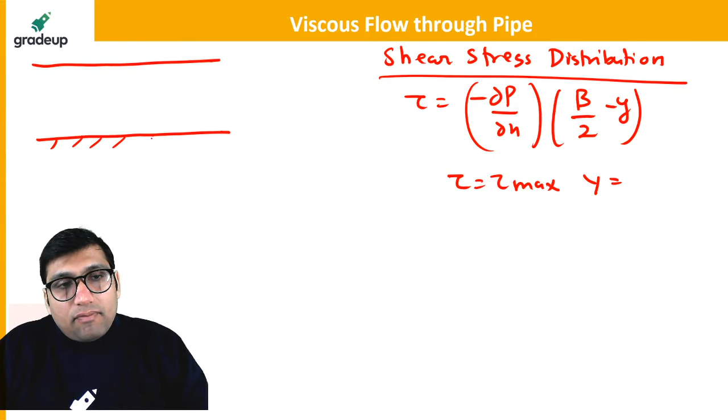Now this shear stress, tau, will become tau maximum when Y will become what? Y is the distance from the wall. At what point does the shear stress vary like this? In the laminar flow between two parallel fixed plates, the shear stress will vary like this.

So it will be 0 at the center. That means when Y will be 0, it will be maximum, and when Y will be B by 2, the shear stress will be 0. This is how the shear stress will vary, maximum here, 0 at the center. So we will be having a linear distribution of shear stress, and the maximum shear stress in laminar flow between two parallel fixed plates will be equal to minus of del P by del X, B by 2.

Clear everyone? This is the formula for maximum shear stress. So these are some important points and formulas that you have to remember for laminar flow between two parallel fixed plates. This is also a very important formula. Is it clear everyone?

At Y is equal to 0, shear stress will be maximum. At Y is equal to B by 2, the shear stress will be 0. These are some important formulas to point out because these are important for laminar flow between a pipe and between two parallel fixed plates.

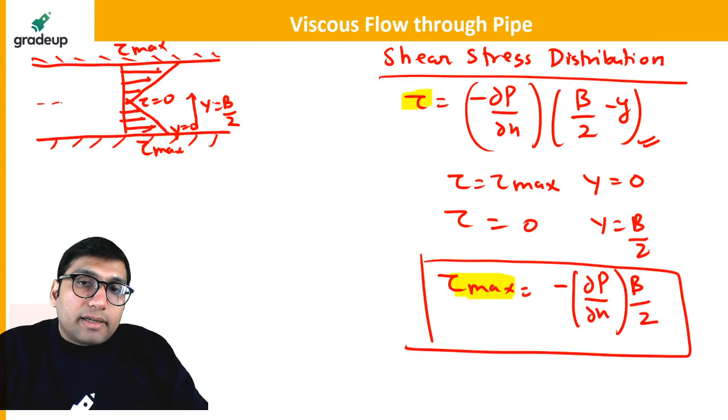Now let us solve a few numericals quickly and then wind up the session. This is the first question that we are going to solve.

In a laminar flow through a circular pipe line of 10 cm diameter, the flow velocity at a radial distance of 2.5 cm from the pipe axis is 0.5 meter per second. The maximum velocity is to be found. So we are having a pipe flow. The pipe is having 10 centimeter diameter. At some local radius, r is equal to 2.5 centimeter from the pipe axis, the local velocity is equal to 0.5 meter per second. You have to find the maximum velocity.

You know the relation u is equal to u maximum into 1 minus r square by R square. This relation is for laminar flow in the pipe. They have already mentioned it is a laminar flow, so you can apply this equation. The velocity at radial distance of 2.5 centimeter is given as 0.5. You have to find the maximum velocity. This will be 0.5 is equal to u maximum into 1 minus 2.5 whole square divided by radius of the pipe square. Radius of the pipe will be 5 centimeter. Divide by 5 square. If you solve it, you will get the value of maximum velocity. Tell me what is the maximum velocity.

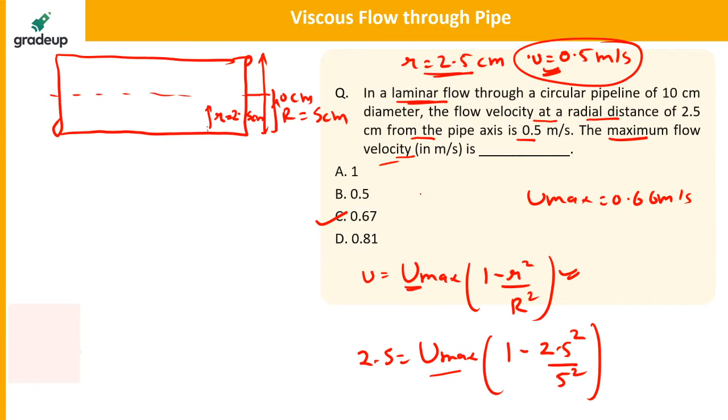Next question: maximum velocity in a flow through a pipe of diameter 400 mm is 12 meter per second. Find the velocity at a distance of 16 centimeter from the pipe wall. This question is a little bit important, so we have to be very careful. It is a very important question, you have to be very careful about it.

What you have to be careful about in this question is that they have given the maximum velocity, which is equal to 12 meter per second. The diameter of the pipe is equal to 400 mm, so the radius of the pipe will be 200 mm, or 0.2 meter.

Now, the velocity at a distance of 16 centimeter from pipe wall. If they say from the pipe wall, that means the value of y is given as y is equal to 16 centimeter. Radius of the pipe is 20 centimeter. The y is the distance from the pipe wall. You have to find the velocity at distance 16 centimeter from pipe wall. Since you don't have a direct relation for y and r, but you know that local radius r will be equal to R minus y, that is 20 minus 16, which is 4 centimeter.

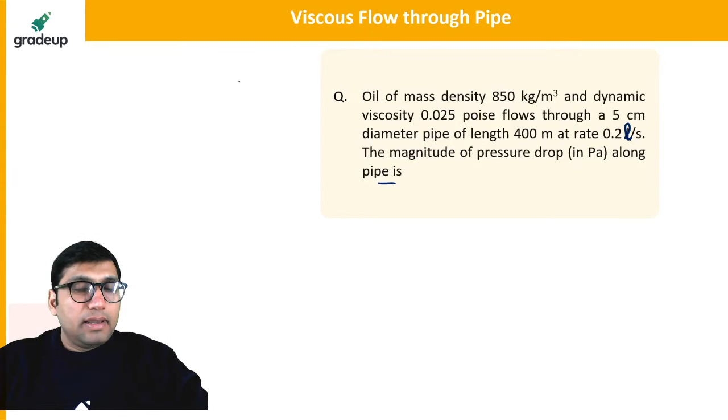Yes, be quick guys, be quick. You know in this question the density is equal to 850 kg per meter cube, they have already given the density. The viscosity is given as 0.025 poise. You can also write it as 0.0025 Pascal second, because 1 poise is equal to 1 by 10 Pascal second. That is the SI unit of dynamic viscosity, right?

Clear? Exactly, all of you are given the right answer for the last question. That was option A. Let's talk about this question.

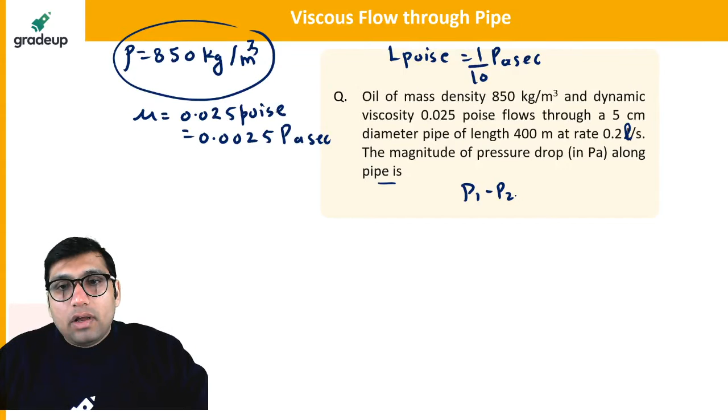How can you solve this question? You have to find the pressure drop. Pressure drop is equal to, you know the formula, 32 mu into V into L by D square. For finding the pressure drop, this is given: viscosity is already given in the question, and the length of the pipe is also given, that is 400 meter.

The rate of discharge is given. You know that discharge is equal to area into velocity, that is pi by 4 into d square. Diameter is 5 centimeter, that is 0.05 square into velocity, average velocity. One more important point: in the formula of Reynolds number you take average velocity, in the formula of pressure drop you take average velocity, in the formula of discharge you take average velocity. So everywhere we have to use average velocity. Average velocity will be getting from here.

Discharge is given to you as 0.2 into 10 power minus 3 meter cube per second. This is liter per second, converted to meter cube per second. You will be getting the average velocity from here. What is the average velocity you are getting? Please tell me, hurry up. The average velocity will be equal to 0.1018 meter per second.

You will be getting this average velocity. Are you getting this? But one important thing I have to tell you.

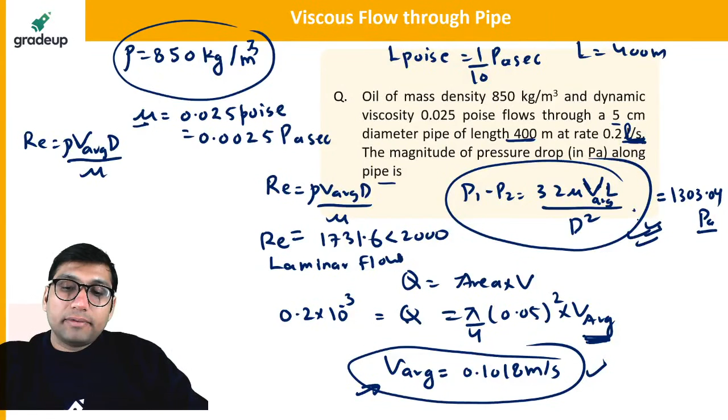Okay, clear everyone? Let us move on to another question. Now this is a question for laminar flow between parallel plates.

In this question they have given that water at 15 degrees Celsius flows between two large parallel plates at a distance of 1.4 mm apart. The pressure drop per unit length is 937.44 Pascal. You have to find the shear stress at y is equal to b by 2.

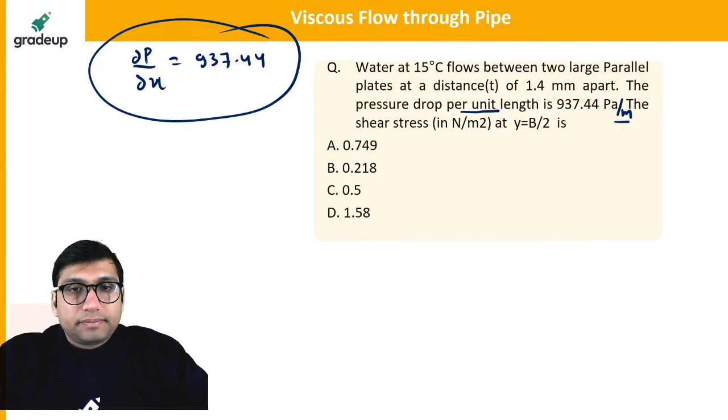937.44. Sagar Subedi is saying 1.58 for this question. Are you sure, my dear Sagar? Are you sure that this will be the right answer for this question?

Yes, you know the formula for pressure drop in the flow between two parallel plates. For parallel plates, the pressure drop is 12 mu into V average into L by B square, where B is the distance between the two parallel fixed plates. This is B here, already given as 1.4 mm.

So how can you solve this question? It is very simple, my dear. Hurry up, be quick.

This is the formula for pressure drop, you know that, but in this question you have to find the value of shear stress. Shear stress, as I told you, is equal to minus of del P by del X into B by 2 minus Y. This is the formula for shear stress that I have told you.

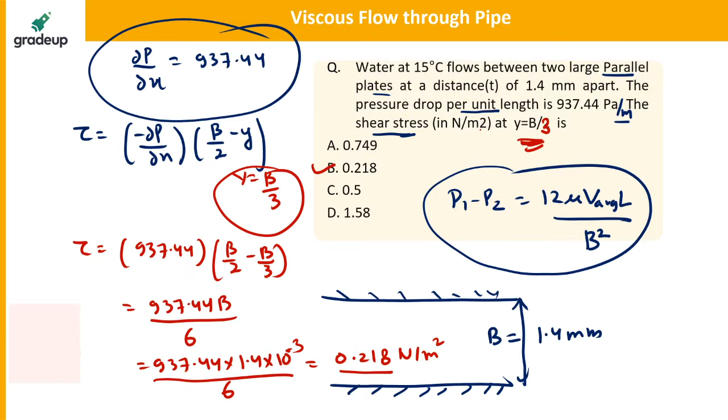Now I think you will be getting the answer, that will be 0.218. Are you getting the value 0.218 Newton per meter square? Yes, the option B, clear? Actually there was a mistake, it has to be b by 3, I'm sorry I did not notice. So at y is equal to b by 2 it will be 0, but at y is equal to b by 3, you are getting 0.218.

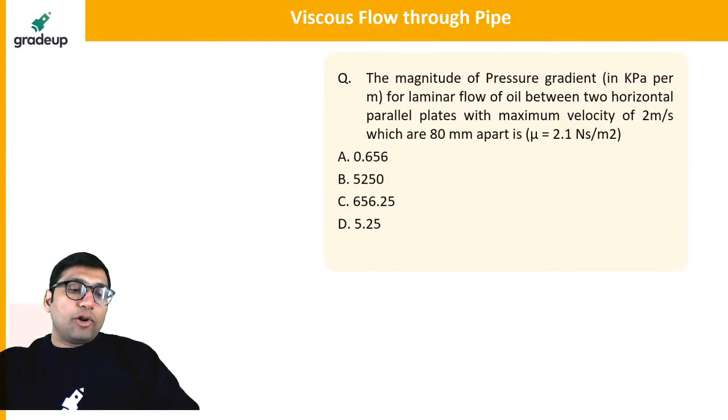The last question of this session. Hurry up. The magnitude of pressure gradient in kilopascal per meter for laminar flow of oil between two horizontal parallel plates with maximum velocity of 2 meter per second, which are 80 mm apart.

So we are having two parallel fixed plates. They are 80 mm apart, the distance between the plates is 80 mm. The maximum velocity is given as 2 meter per second. You have to find the pressure drop per unit length, that means you have to find the dp by dx in this question.

Yes, come on guys, be quick. Hurry up, give the answer quickly.

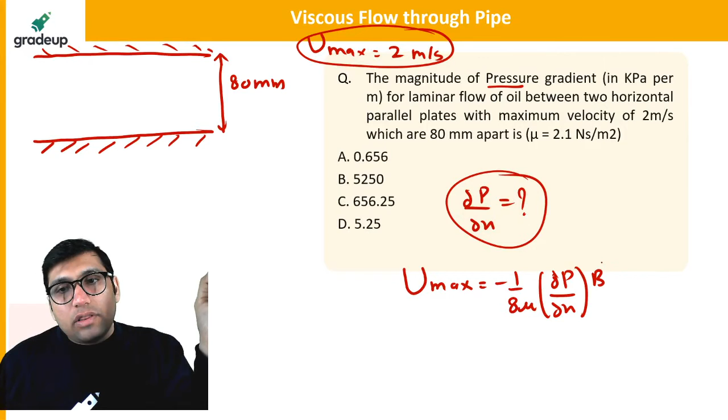So how can you solve this problem? You know that maximum velocity is equal to minus 1 by 8 mu del p by del x of b square. You know this formula? This is a formula for maximum velocity for laminar flow between two parallel fixed plates.

So you can use this formula and simply tell me the value of pressure gradient del p by del x. Everything is given - viscosity is given, distance between the plate is given, maximum velocity is given. You can tell me the pressure drop. Yes, hurry up, be quick. Akshay Singh is saying option C, 656.25. Are you getting option C really?

Are you getting option C or option B or something else? You have to find the pressure drop in kilopascal. Akshay Singh is saying 0.625. So this is equal to 2 here. It is 1 by 8 mu. Forget the minus sign, they are not asking for the sign, just the magnitude. It will be 8 into 2.1 into del p over del x.

Into 80 mm, which is equal to 0.08 meter. This will be 0.08 square. If you solve it, you will get the pressure gradient. The pressure gradient will be 5250 Pascal per meter. In kilopascal, that will be 5.25 kilopascal per meter.

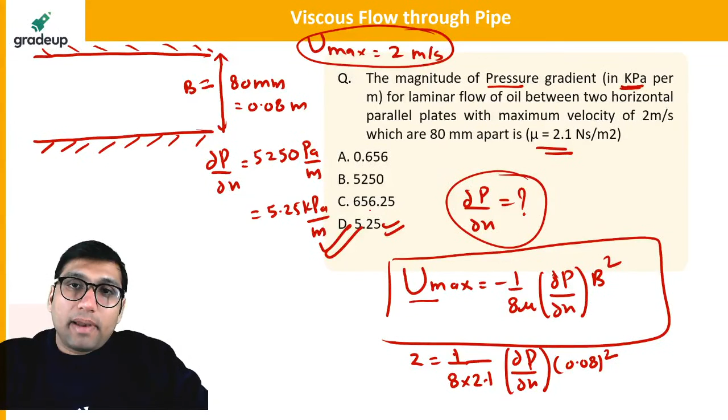So that is all in this session. In this session we have completed viscous flow through pipe, and also I have told you the formula for viscous flow between two parallel plates. With this I would like to conclude the session.